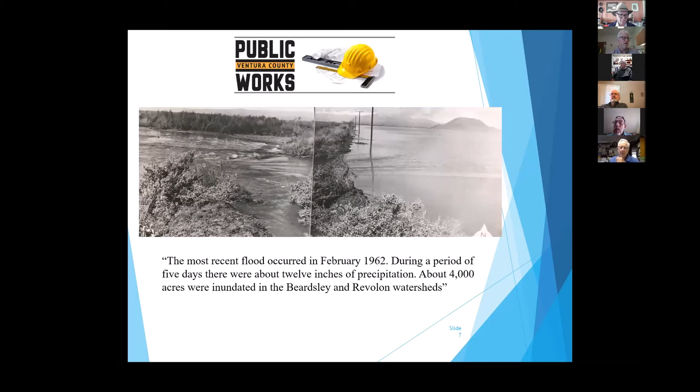That really kicked off probably our most significant joint effort together. I'll zoom in on the next slide, but you can see all these colored segments are all different units of projects that we worked on together.

I'm not exactly sure when, but I think it's probably somewhere in the mid to late 70s, the Watershed Protection District created a design section specifically for Beardsley and Revolon, and all they did were design sections and put them waiting for money to materialize.

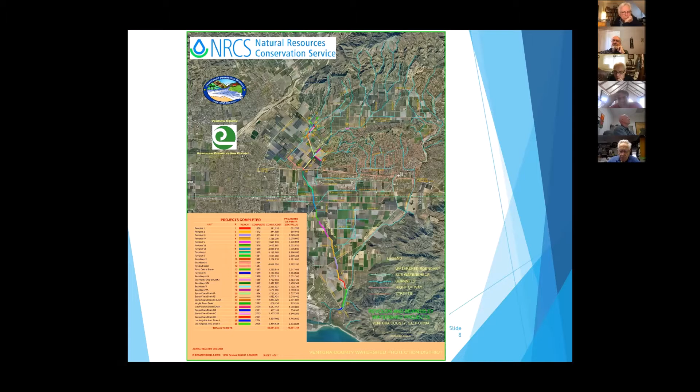I think, I don't know if it was my dad or somebody else, but figured out that if you had a design in September that you could bid out, there might be money at the end of the fiscal year. And we did, I think, a number of these units of work with that kind of funding.

Peter, this is Hugh Clabaugh. Hey, sorry about that. Hey, glad you made it, Hugh.

We started the design probably around 75, and yeah, you're correct. We only did the design of the Beardsley and Revolon watersheds at that time, and SCS at that time, they were doing the construction of it.

I think in late 78, we started doing also the project management on them. It started up on like Revolon 7 or something like that, and then all of the Beardsley watershed. But your dad, Alex Sheydayi, was the one that implemented all of this and made SCS at that time feel comfortable with us doing the construction of all these projects. So that's where it started.

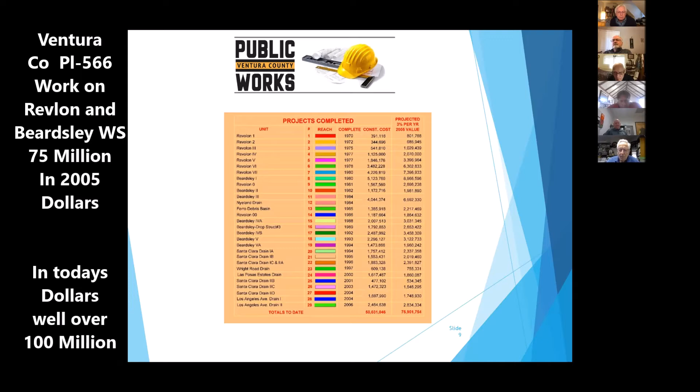In '05, I escalated these costs into 2005 dollars, and it was about 75 million. So I'm sure if you escalate the cost to today, we're well over 100 million that's been invested in the watershed. And I don't think that included the disaster money we received from them.

It's funny, let me regress a little bit, but we were very aggressive in getting money. What we did is when we did all of our design, we basically had the whole watershed, Beardsley and Revolon watershed, designed, or almost designed, where it could almost go out to bid.

So at the end of the federal fiscal year, when they had money left over, we would tell NRCS or SCS at that time, that yeah, we had money, we could get these out in a couple weeks. And we would seem to always get these projects out. It was a great partnership with the agency, and we were very grateful, and they were very grateful, because I'm not sure they would lose the money or what.

It was a great relationship, and we were able to spend money effectively, in large part due to the fact that you guys were ready to go all the time. So that was wonderful.

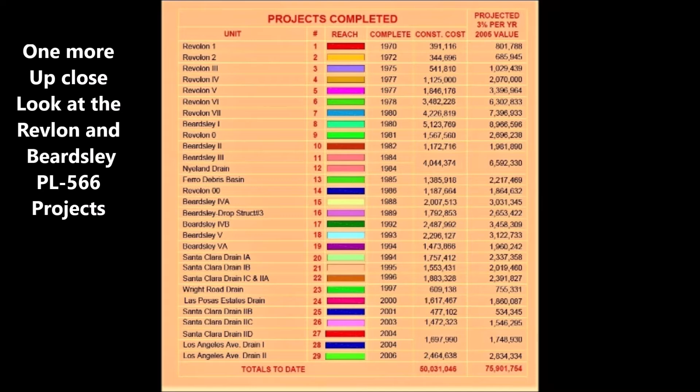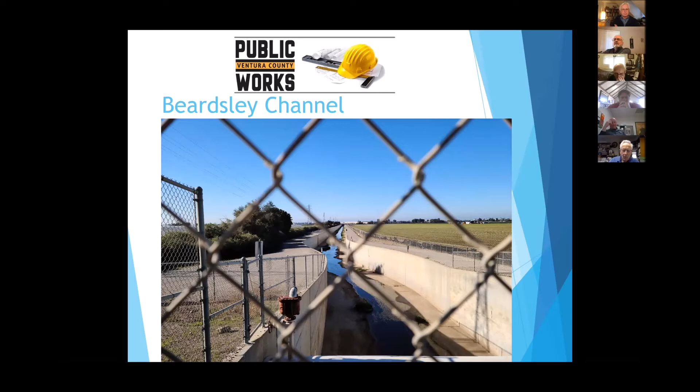I've got a bunch of construction photos that I can show. Here's LA Avenue Drain Unit 2. This is the last section that we built back in '06. It's kind of a fun photo with the construction workers taking a break, eating some lunch in the channel.

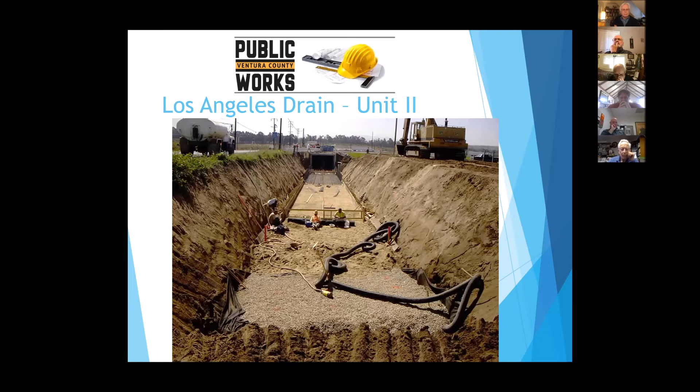Excavation, you can see the subgrade. We've got material there for the subdrain, and then they're laying steel there in the background. There's another photo of that.

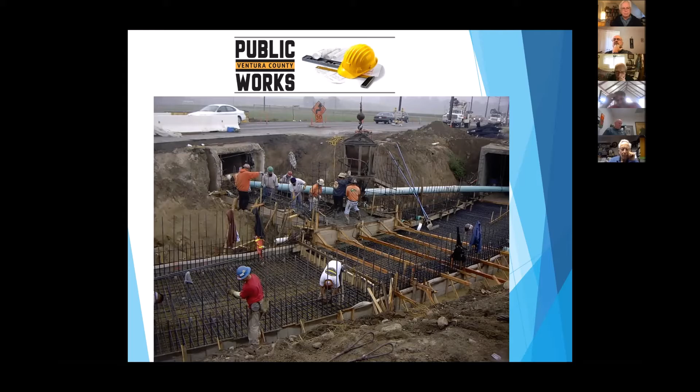Here we got some concrete placed on an invert and a junction structure together with the steel, construction workers laying some steel. I think we're right about ready to put in the subdrain pipe after the box was cast.

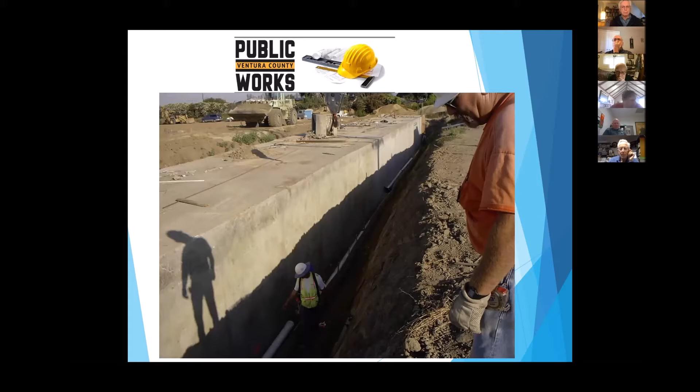We got then backfilling the sides of the pipe. And then this was an interesting project, which we don't do all the time, we do occasionally. We had a fair amount of pavement because we were crossing State Highway 118 right there in Santa Paula.

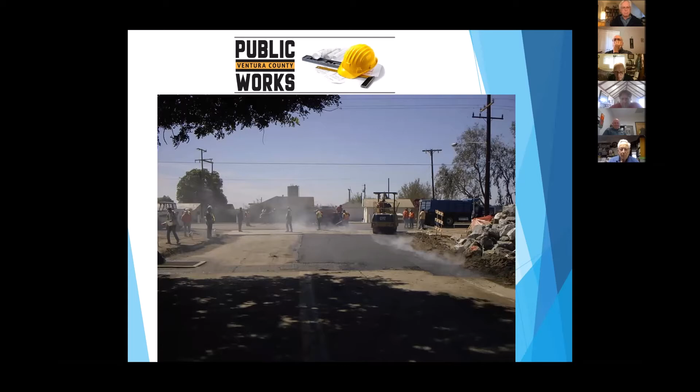Here's the final inspection. This was probably in '06. Of course, all the NRCS folks, the contractors, some of our maintenance workers. Charles, I see Charles in that photo. Yep.

As Hugh indicated, we've done a lot of watershed projects, emergency watershed protection projects over the years. Probably even before they called it that program, back in '78. I don't think it was called EWP back then. But this is just a sampling of the work that we've done together - bank protection projects in Casitas Springs and White Oak Acres, cleanup. I recognize a lot of those names.

Well, you know Bill, as you recall, one of the more interesting projects was Adams and Fagan debris basins. We basically designed those in probably 2 weeks. Yeah, both of them. And we had them out to bid and probably under construction within a month. And at that time, we had 200-year storms back to back - in February and March.

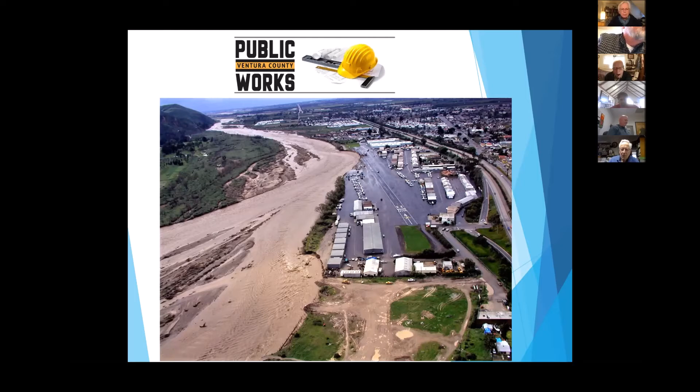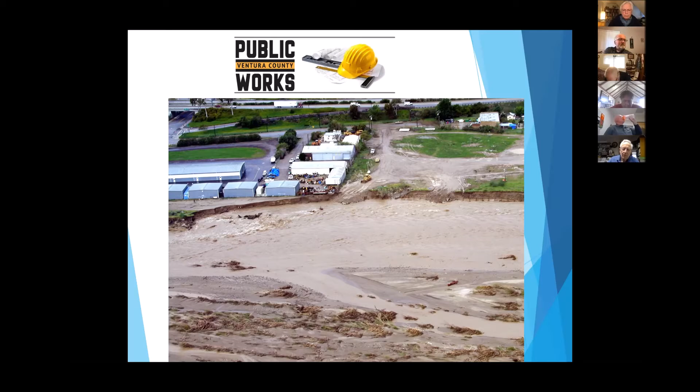There's some close-up photos of the damage. You can see in the background that the runway was almost completely lost right there at one point. And we got, of course, happens with these projects, it was the politicians that kind of got things moving. I think Elton Gallegly had a hand in getting NRCS to prioritize some money.

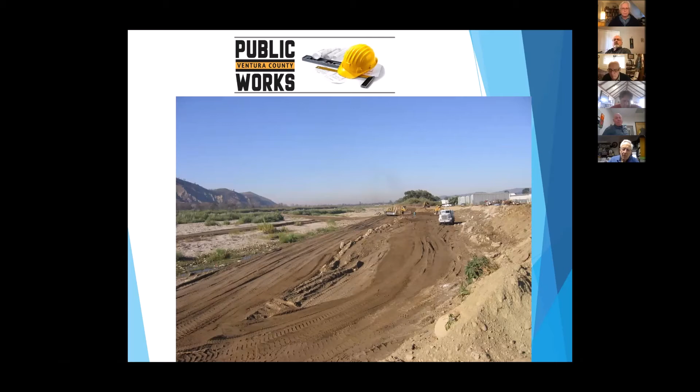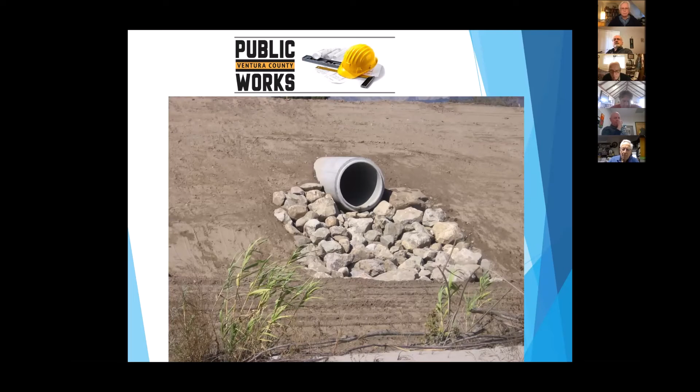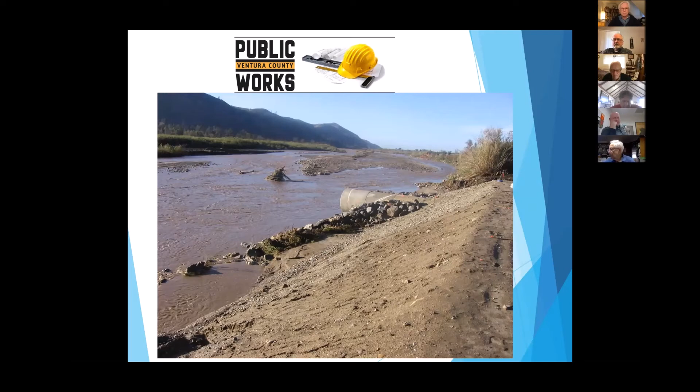And we had to do this in a couple of phases. We started with an emergency authorization where we filled in the areas that were lost, and then just put in the pipe drainage that went through that fill, but weren't able to put in all of the bank protection that we wanted to. So we bid out in late 2005 a contract, and then had to basically work through the winter of '06 before we could really, later in '06, get the rock riprap in.

And one of the requirements, because it wasn't really one of our facilities, it's privately owned, the regulatory agencies insisted on us planting the bank protection, and the airport was okay with that. So we did a lot of willow cuttings, and it really filled in nicely.

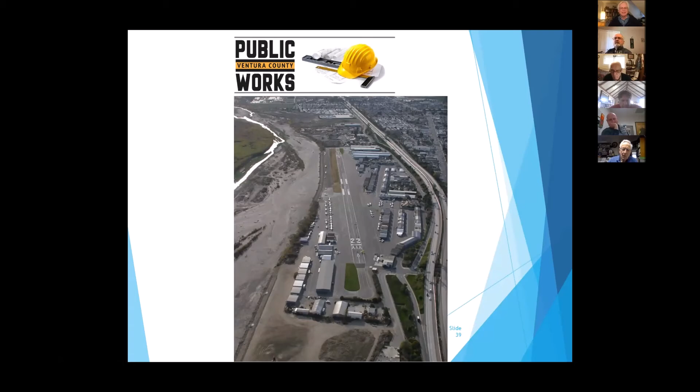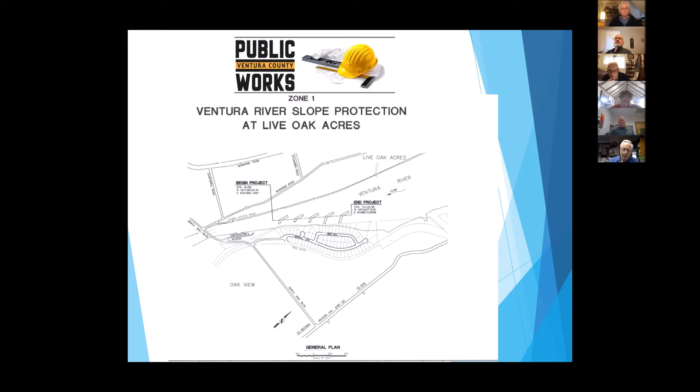It's another really difficult project, the Zone 1 Ventura River bank protection. These were putting in a set of large vanes, a little different than Santa Paula Creek. Really large material, 6-ton rock riprap, with just solid rock riprap vane.

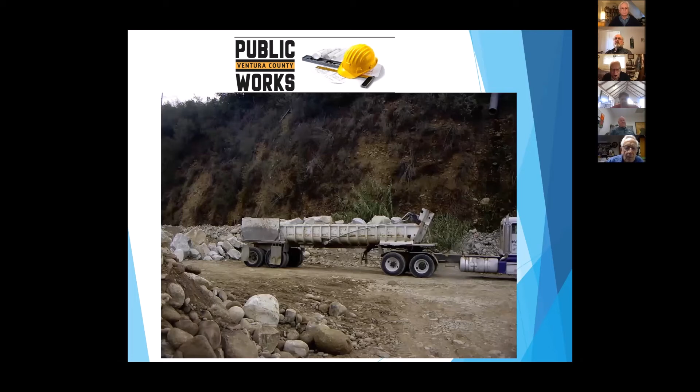With 6-ton rock, you can't get too many stones in one area, and that presented a challenge for us because we needed to give instructions to inspectors on how to determine whether we were meeting spec. We worked with the state office to give us guidance on taking measurements, and with some equations, determining what the rock size would be and showing we were meeting the 6-ton D50 requirement.

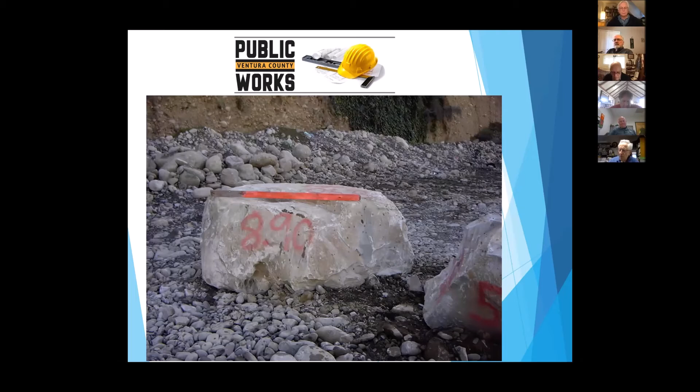And here's one of those installed.

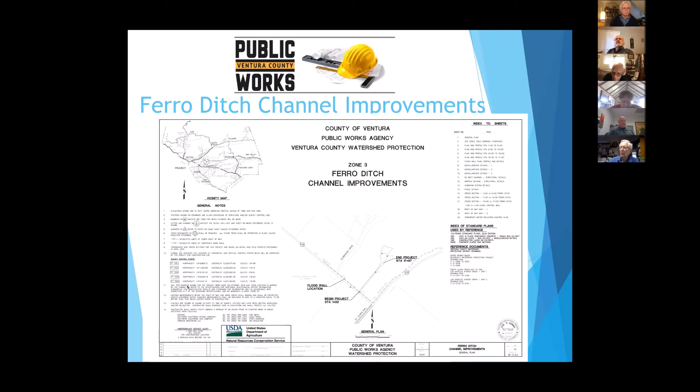Just a couple of upcoming projects. We've got a grant for the final unit of the Beardsley project. We thought we were done in '05 or '06 with LA Avenue, but we decided we really needed better access to the debris dam. We had a section of channel that was in pretty bad shape along the ditch, and for whatever reason it wasn't in the original 1963 work plan, but we were able to modify the work plan and get money for design from NRCS. That should be going out to bid in the next 2 months, so we'll be in construction this summer.

Just the last slide here. This is an RCPP - I don't know if any of you know this program. It's called the Regional Conservation Partnership Program. At the end of 2020, we submitted over a $6 million grant application for a project in Ventura River called the Matilija Dam Ecosystem Restoration Project. It's a dam removal at its core, but includes a lot of levees, a couple bridges, and some water diversion projects. We've got a bunch of different components, including some on-farm conservation work, and in that work plan, 3 levees and a water diversion facility.

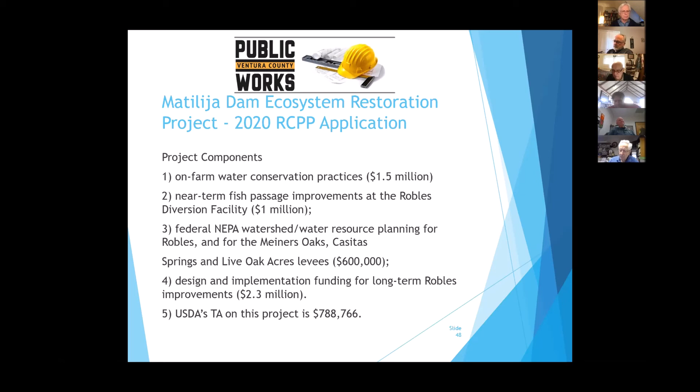We never run out of work, do we, Peter? No, we don't. If we're successful, we'll be continuing on working together. Hopefully we'll find out in the next couple of months if that application meets everybody's approval.

Anyway, so that's my presentation. Thank you, Peter. Wonderful, wonderful.

Where's Hugh Clabaugh? I don't see your picture there, Hugh. You might have to look at your video - there should be a little camera icon. I think you're... yeah, I see it, and I press on it, but it still says... unfortunately, I don't do this very much. You're not alone, my friend. I try to avoid all this stuff. Can you see the rest of us? It takes away from the fun I'm having being retired. Can you see the rest of us? I can see you guys. Yeah, I saw the good presentation, saw everything.

It's great, Peter, that was a great presentation. It was, Peter, thank you so much. I'm going to back out - I have to head to another meeting, but it was nice seeing all of you. Thank you for all your years of service. It's been absolutely... Hugh, thank you so much. I was telling these guys, Hugh, that you're also great to work with. When I called you up the other day, we hadn't talked in years, and it was just like old times. Oh yeah, yeah, we connected, had great times together. Yeah, it was so much fun. Thank you, Peter, so much.